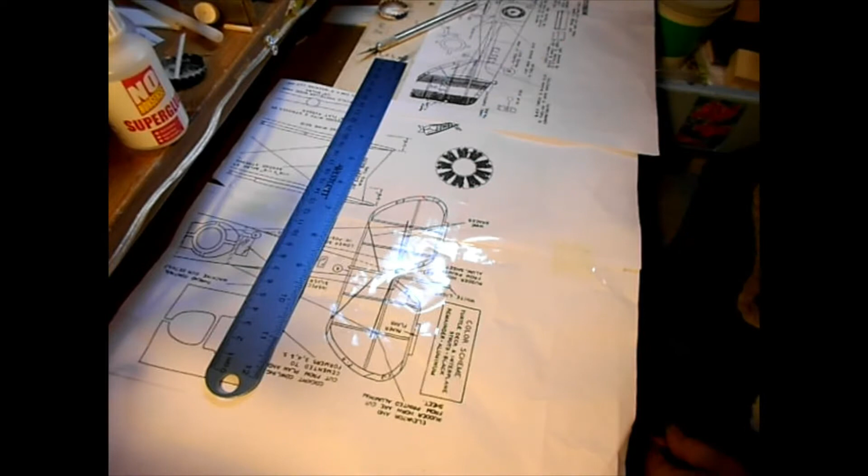Okay, good. Time for tailplane. So usual sellotape over the joints. So it's 1/16 square for the frame. The tips are the trickiest bits. I'm going to probably just build that out of crude pieces and then I'll shape it afterwards. But I'll fast forward a lot of this so you can just watch. Okay, let's get on.

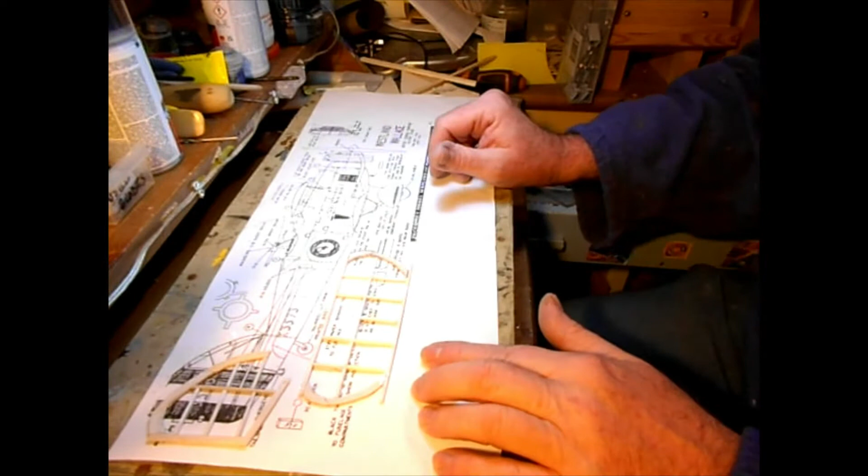Okay, so we've got this fin done and the tailplane done. Just need some sanding just to get the shape right, and that's all the main components done. So we just need to do some assembly, which is going to involve a little bit of thinking. So sanding first, let's get these profiles right.

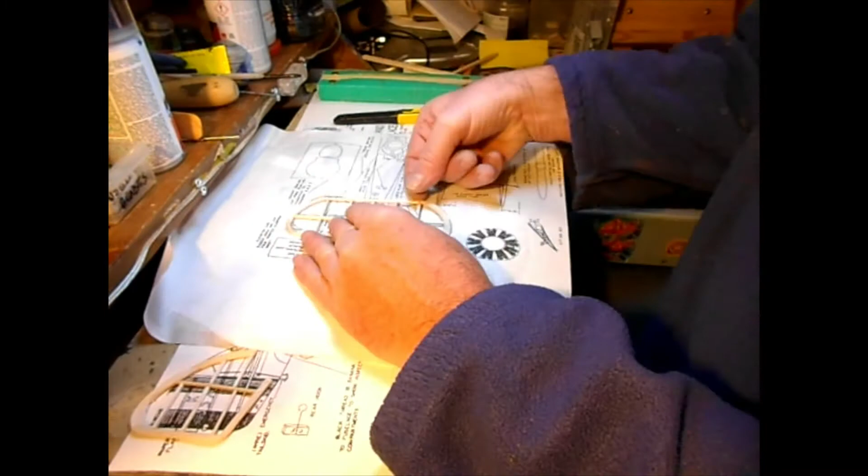Okay, so that's pretty good to the outline. I just need to add E6 and E5. I haven't done those bits, and the tail fin's looking pretty good. And then, like I said earlier, all the main components are done. I need to start thinking about how I'm going to attach the wings to the fuselage, strut positions and stuff, because there's nothing on the plan really to indicate how to do that.

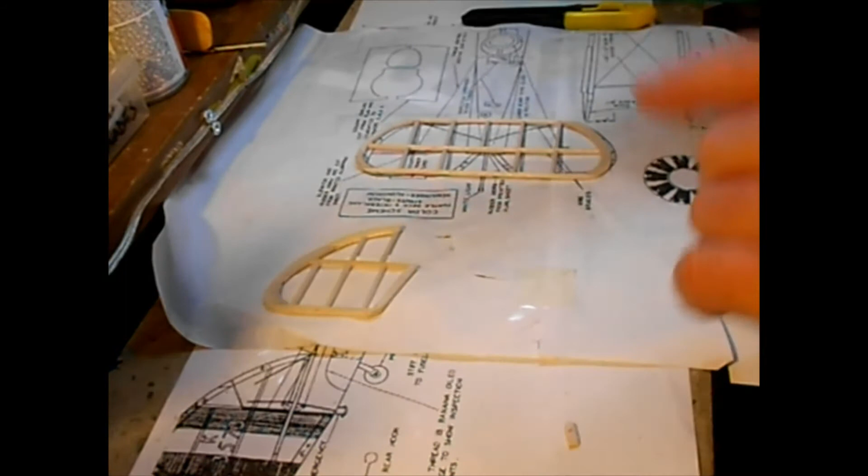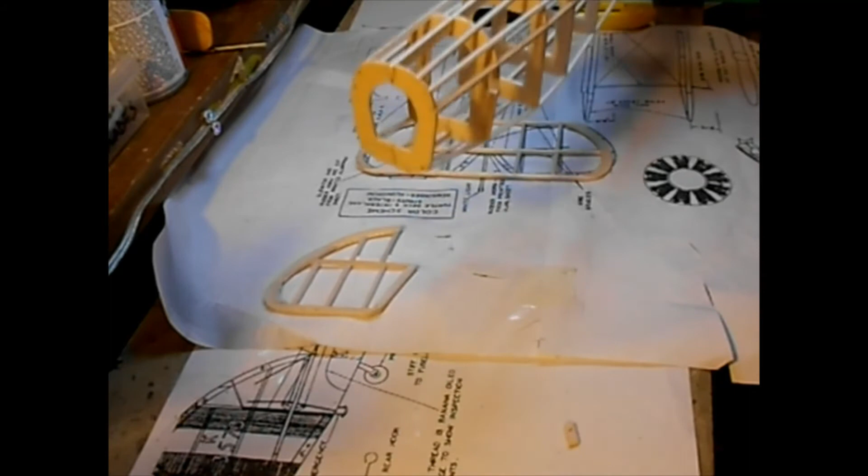So I need to put some anchor points in for attaching the wings here. I'm going to put some sheet in there, I think, and then something to support the struts on the top. So that needs a bit of thought, and in terms of struts on the wings as well, it doesn't really give any clues. It looks to me like they just want me to stick it directly on the ribs. I might do a little bit of a doubler on the rib just to give it some support there. So yeah, a little bit of thought and a dry assembly before I start tissue covering. That's always the fun bit.

Right, all the main components are done. Wings, tailplane, tail fin, fuselage.